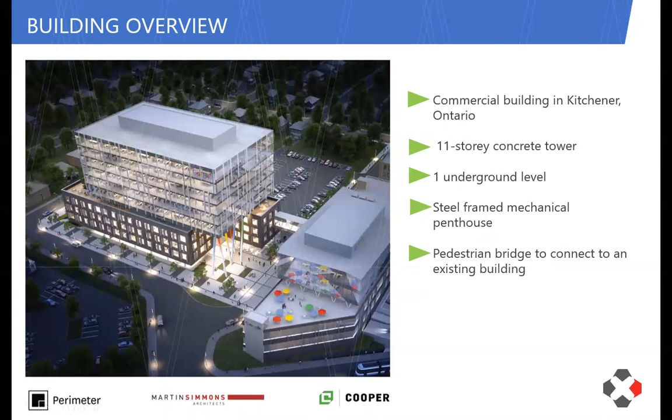Okay, thank you. The main feature of this building is structural steel columns that support a sixth-floor overhang at the corner of the building. So that was the main design challenge of this project. I'll get into more of the design and construction challenges a little bit later in the presentation.

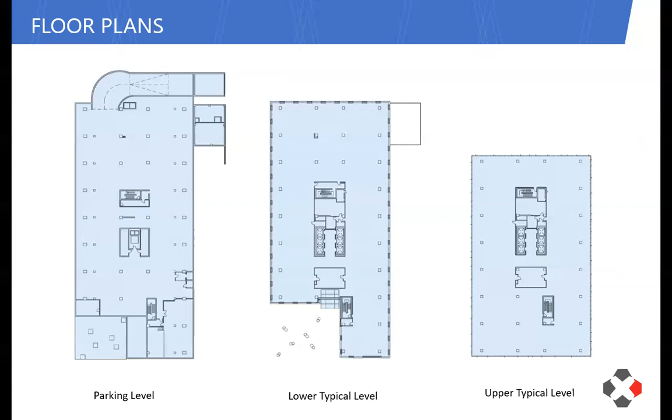So the floor plan for this building, it's an office building, so we were able to use a pretty simple concrete column grid system. The underground level is parking, the first framed slab level is the ground level, and all the levels above that were typical office loading.

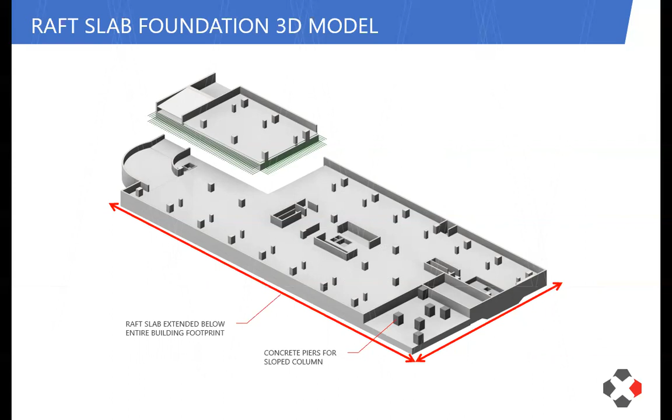Typically in this type of project with concrete columns, we like to use concrete spread footings. However, the geotechnical report revealed that we had quite low bearing, only 200 kPa SLS and 300 ULS. And with our loading, spread footings just weren't an option.

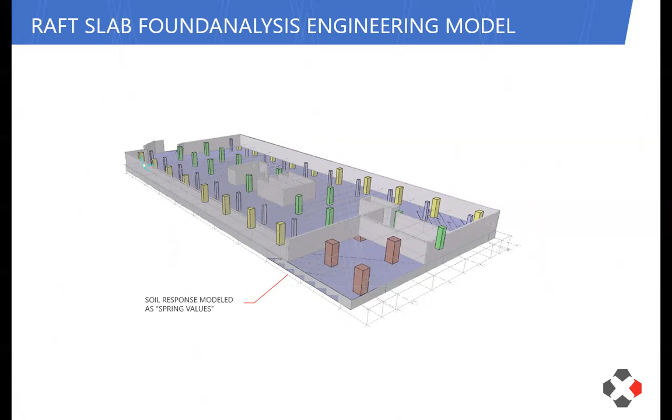So we had to pivot and use a raft slab. We used SAFE to model our raft slab, using the soil modulus to mimic the soil behavior under load. Then we could evaluate the maximum pressures and compare those to our design limitations. It was a bit of an iterative process to get our final thickness, which was 1.8 meters thick.

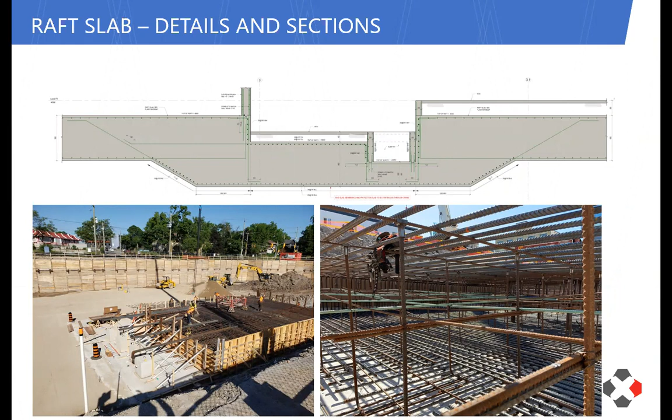As you can imagine, 1.8 meters of concrete is very thick. This is one of our sections through our raft slab. We had to step it down in certain areas to accommodate our elevator core, some pits, things like that. The picture on the left is our first pour, our concrete crane raft. The picture on the right is actually standing in between the top and bottom bars of the raft slab, just to give you an interesting perspective of the volume of concrete that needed to be poured.

A couple more photos of the raft slab through construction progress.

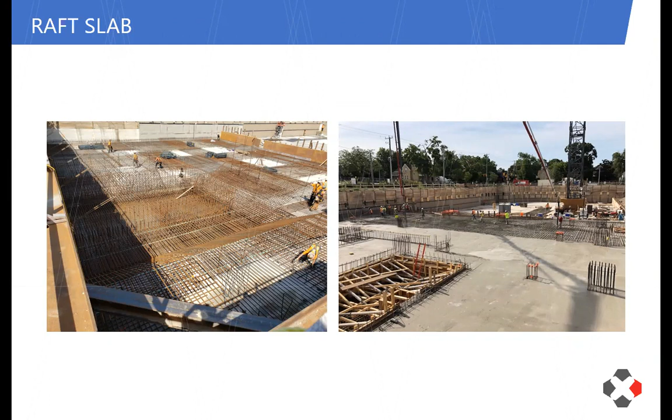Next, I'll talk about the specific foundations for our steel incline columns. We continued the raft slab into the corner where the steel columns were, and we used concrete piers at the base of the steel columns. We broke it into 2 pours, because we needed the top of the concrete pier to be at a very precise angle.

As you can see, we cast in place a set plate with anchor bolts with the second pour at that precise angle. Then when the steel columns, which were manufactured with the base plates on them, were installed, they could be installed precisely at that angle at the exact location we needed. One of the construction challenges was how to get that angle precise. Means and methods were not up to us, but we tried to make the design as easy as possible so all the trades on site could work together in an easy manner.

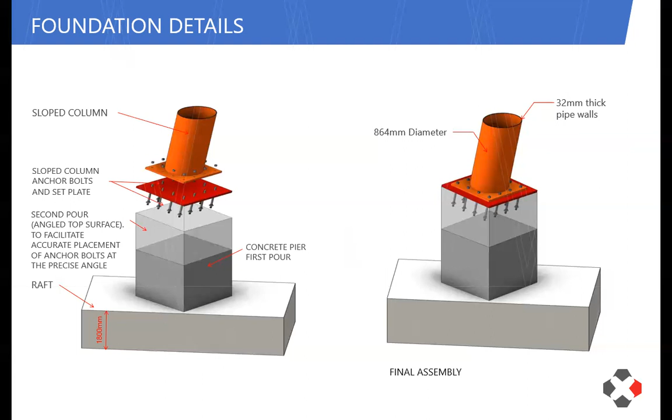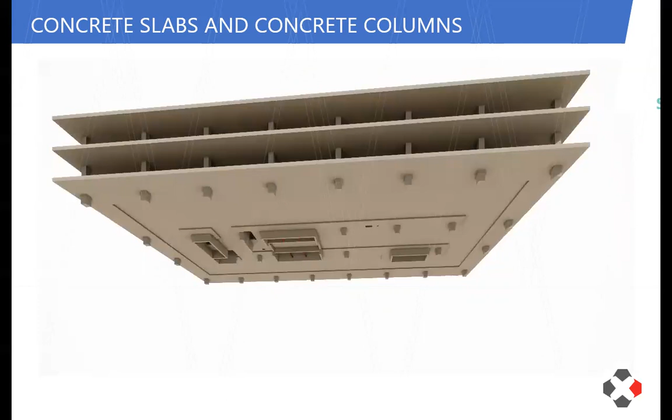Next I'll talk about our typical concrete structure. We used concrete slabs, concrete columns, and our lateral system was concrete shear walls at the 2 stair cores and 2 elevator cores. We also used continuous drop panels to control some of our limits such as deflection and punching shear.

So deflection was a big issue here. We had to go back and forth a number of times to refine the shape. It used to be more of an L shape, which created more issues for us that we just couldn't work around. We were able to reduce that L to a more reasonable size, and we were also able to use more steel around the opening, compression steel, to reduce that maximum deflection.

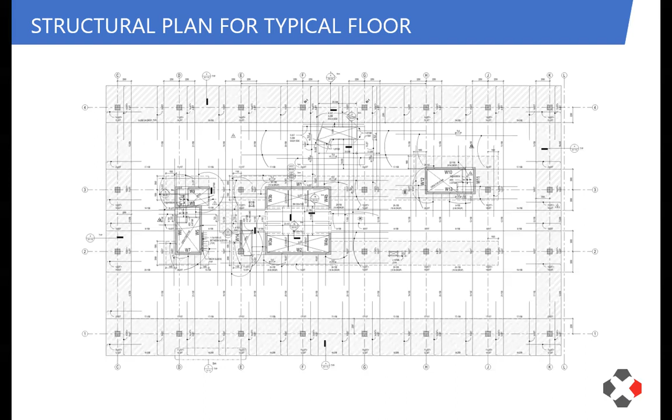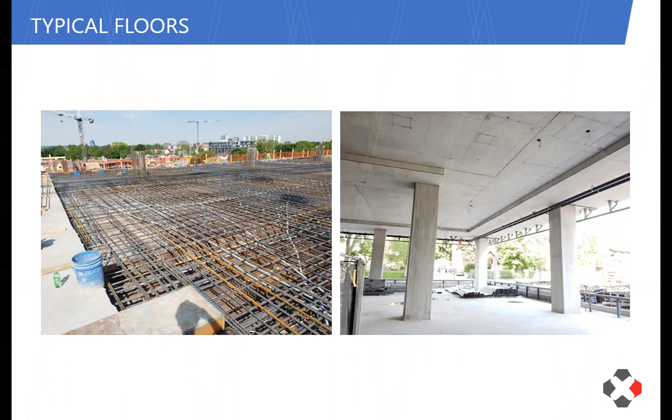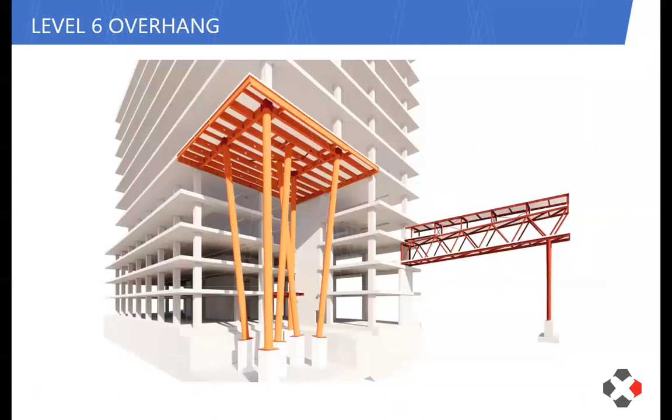These are 23 meters tall, so it's quite a feature of the building. From the underside, you can see we use steel framing, and then we use concrete on deck. So from above level 6, it's all uniform concrete.

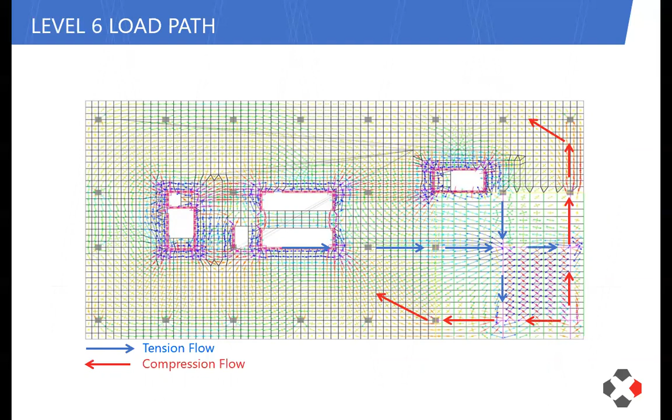These steel columns were actually only meant for gravity, only taking gravity loading. They're not part of the lateral system. But since they're on an incline, with a bit of an angle, they do create lateral forces. So we had to design the steel beams to take those tension and compression forces to the concrete slab, which worked as a diaphragm to transfer those forces into our lateral shear walls. That's how we resolve those forces, so the columns could act only in gravity.

These steel columns were actually big pipes. They weren't specifically manufactured or custom for this project. These steel pipes are actually used in industrial purposes, but we were able to purpose them for our structural use. What made them unique to this project was the length, so they had to make 2 together to create that 23 meters. One of the challenges in the shop was to make that weld seamless, so visually it matched what the architect wanted. The top and bottom of the columns were also manufactured in the shop.

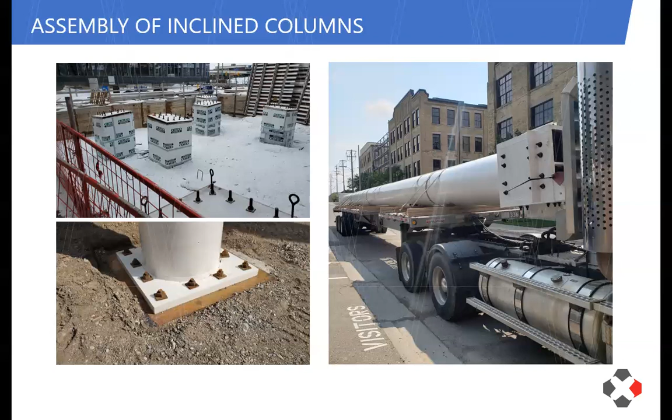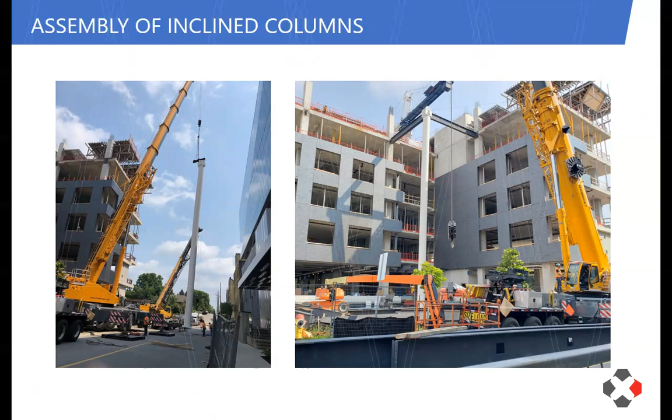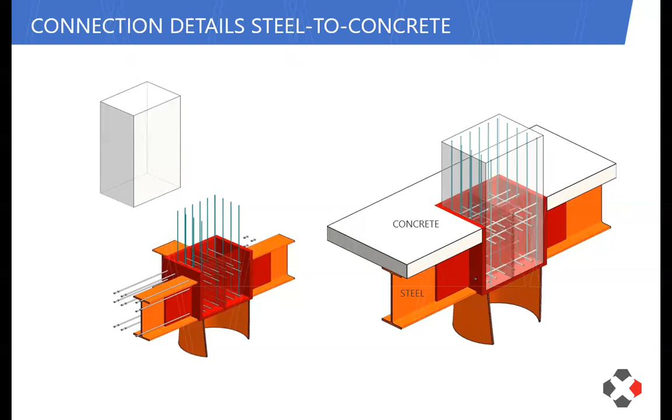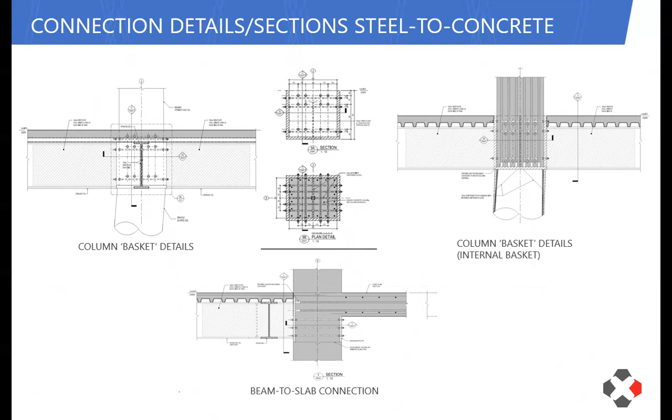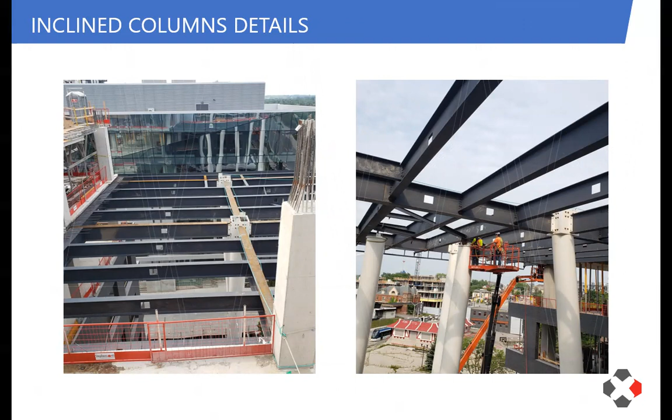Some photos of construction at the top of the steel incline columns. These connections were for the structural steel columns, and for the 2 non-structural columns we just used a vertically slotted connection. You can see on the left, the deck under construction with the structural steel beams. On the right, there are the 4 structural steel columns in place, full height. The one in the middle is one of the architectural ones.

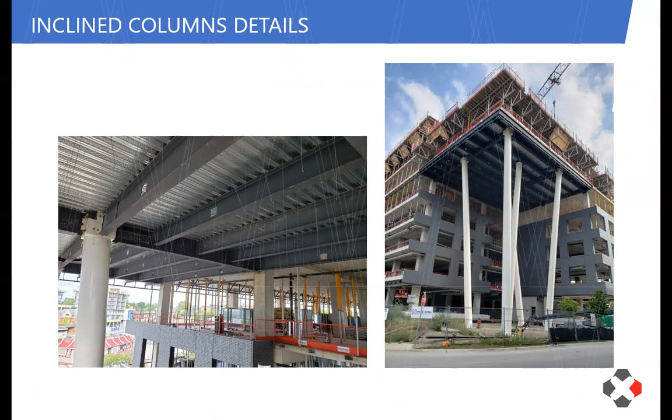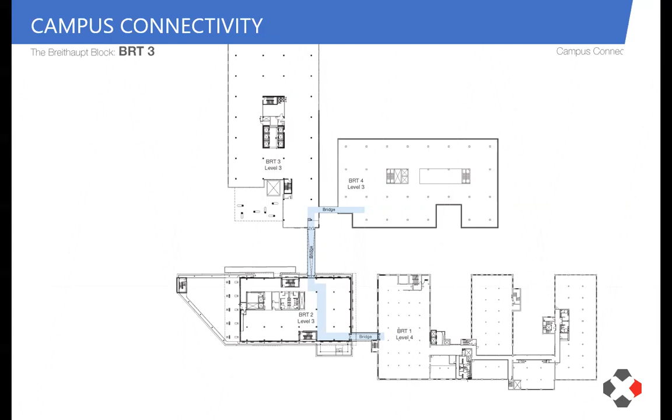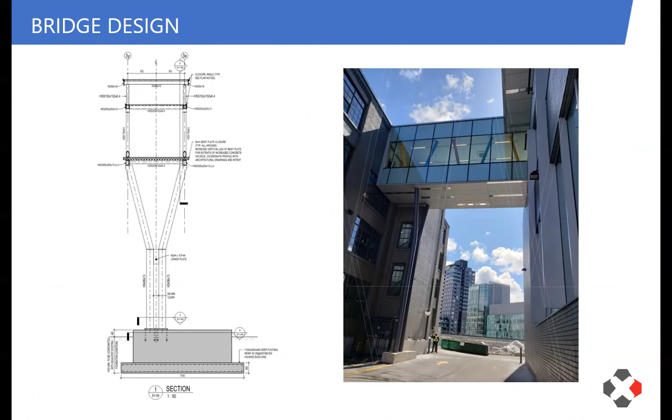On the right-hand side is a photo of the already existing bridge connecting the first and second buildings. Our intent was to match the design of this bridge so it all looked cohesive across the campus. We utilized the steel Y-shaped column in our bridge. This was useful for us as we didn't actually connect the bridge physically to the existing building. We used an expansion joint, and that Y-shaped column provided the bracing and the gravity support at the existing building end. Then on our end, we physically connected to our phase 3 building.

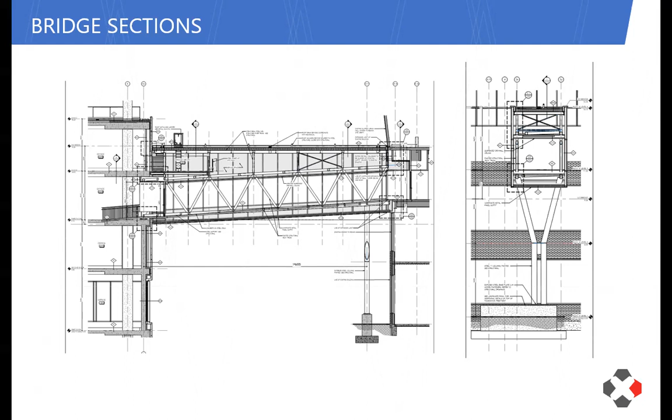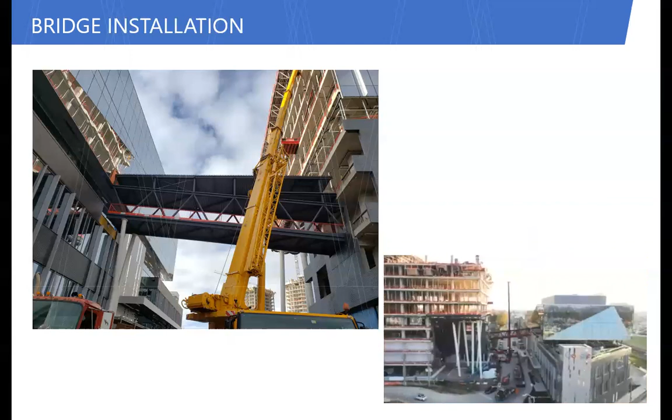One of the other design challenges we had was the foundation for the Y column. We ended up using helical piers so we didn't disturb the foundations on the existing building. Otherwise, we would have had to interfere with those foundations, which just wasn't realistic at the time.

Here's a photo of the final placement of the bridge. A couple weeks ago, we found out that this bridge won an award of excellence in steel construction from CISC, in the category of architectural walkways, pedestrian bridges. This included us as the structural consultants, the architects, the steel erection company, and general contractors and developers. So the whole team was involved in that award.

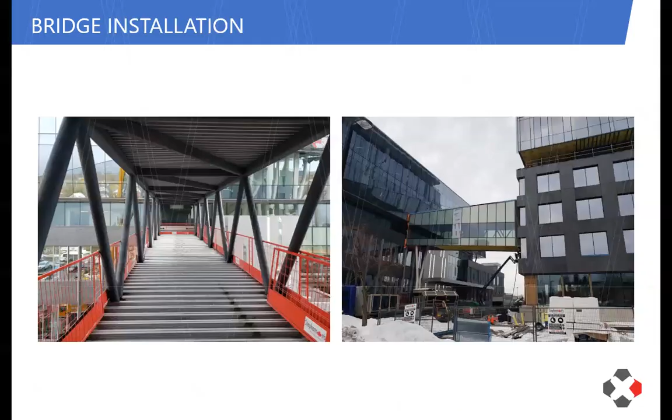Here's a photo as of a couple months ago. As you can see, all the steel elements, all the structural elements are in place - all the steel columns, the pedestrian bridge, all the cladding is finished now. So all the main structural components are finished. Now they're just working on the rest of the building - electrical, mechanical, the tenant fit out requirements before occupancy. Are there any questions?

I have a question - are the structural columns also connected with an angle, or is it just what I'm seeing in the pictures? They're actually at an angle.

So the common joke is that architects always want engineers to magically defy physics. Do you get a lot of that? Yes, I've joked with coworkers that they want floating things, and we can't make floating things happen. They were pretty insistent on this kind of feature, so we made it. It's a pretty neat, pretty unique feature.

You said there are structural inclined columns and then non-structural ones - how did you ensure they don't carry gravity loads? At the top of the non-structural ones, we use a vertically slotted connection, which allows a little bit of movement at the very top. So the gravity load will never reach those columns. Also for lateral loading, all of them are designed just for gravity loading.

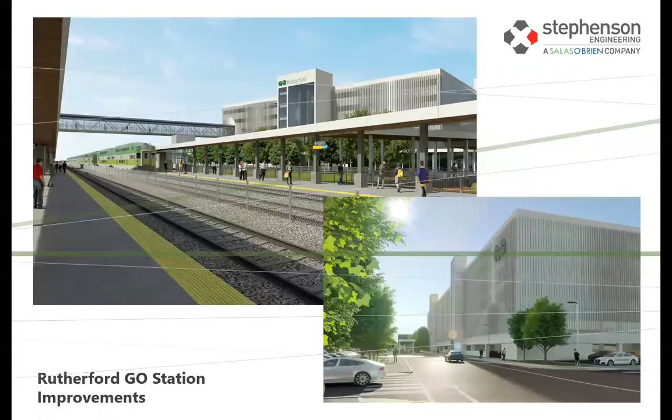I'll be talking about another project we did. This project was finished just last summer. It's a different type of job - this is not what we'd call a building, which is 90% of our work. This is a transit job. This is Rutherford GO Station. I don't know if some of you are already familiar with Toronto - we have these GO stations for commuters going all the way to Toronto Union Station to their offices. This one is on one of the lines coming into Union Station.

Rutherford is an existing GO station already in Vaughan. Metrolinx, which is the owner, or the main client of all of these stations, a crown agency funded by the provincial government, wanted to improve that station. It didn't have enough parking, and it only had one platform - just two tracks with one platform, no other platform, just on one side. So they wanted to improve it. This job is a P3 job.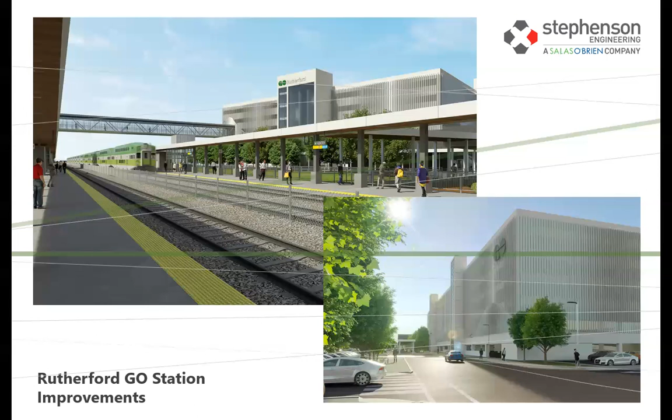So what is P3? In our daily projects, we get hired by a client, a contractor, or an architect, through an RFP or request for proposal - we put in a pricing and they choose a team based on cost and qualification. But these governmental or infrastructure jobs are more complicated - really big jobs, we're talking $500 million to $1 billion, like a hospital or a transit station. So it's a big risk for the government to just say 'this team will do it.'

So what they do is go through something called public-private partnership, P3. It's basically a procurement method where Infrastructure Ontario, the government in that case, and Metrolinx, hire 3 teams. These 3 teams will work for a certain period.

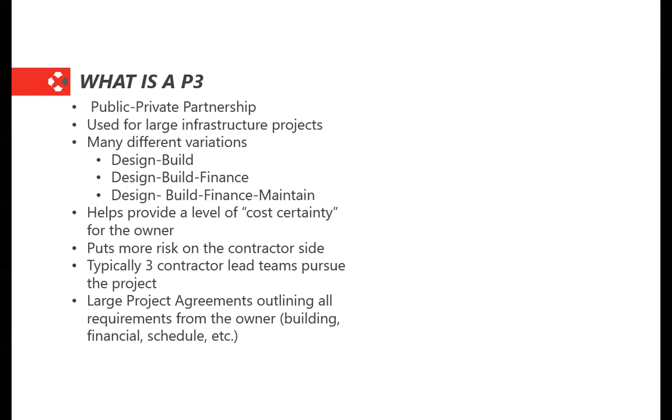So what does this mean? So during design, let's say a year of design, we're all working hard as one team, and there are other 2 teams working, coming up with all of the ideas to improve cost and schedule. Because you don't know, you have to really work hard with innovations and ideas to be the winner at the end. And most actually the cost, we're carrying the cost on our own. Like the government would pay us something, but not enough to cover our costs. So there is even also a risk here that if we lose a job, we're losing also on our bottom line and our finances.

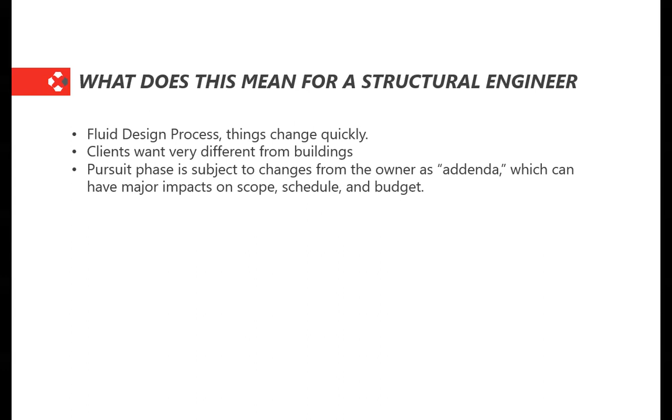During that time, ideas can change over time, so you can keep repeating design. Everyone coming with an idea, the contractor would say it's better to do it this way or that. So it keeps changing. But we've been doing this for at least 2 decades now, and we've been familiar with the procurement.

Now let's talk about the project itself. So the project, you can see here this aerial view. This project is completed now. So this was a rendering way back. It's a $240 million contract.

It has a parking garage component, which you see over that 6-story parking garage, because that was one of the purposes. There was not enough parking, and it was a problem for commuters always. They couldn't find parking. I remember when I was working downtown years back, I got tickets many times because I couldn't find parking.

So that's the 6-story parking garage. And also all of these, the platform on this side, that was an existing platform. They wanted to improve it, and we built a new platform on the other side. We basically connected them with tunnels below the railway. And also to go from the garage to the other side, we have to connect them with a bridge over the railway. There is a lot of other canopies and things like that.

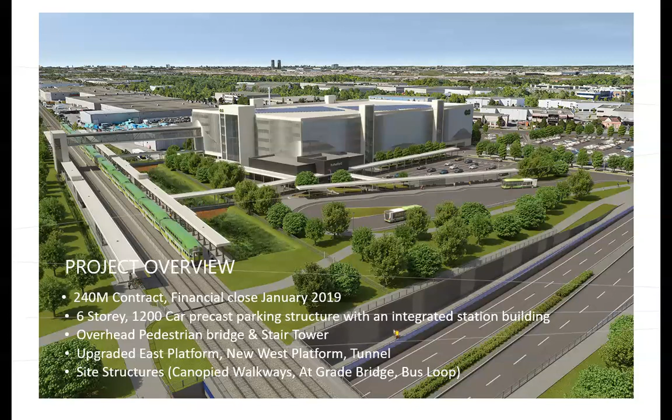So we'll talk about the parking structure. It's a 6-story structure, as you see here. It actually had some solar panels on the top. It was a precast garage. When we design precast, it gets a little bit complicated in terms of we design foundations, we design the lateral system, and we are, at the end, the engineer of record. But we get a precast engineer who will design all of these precast elements.

So when you look at the floor plan here, I think this was about an 18-meter clear span for the cars to go through. So these are pre-stressed double T's to basically be able to span 18 meters, or 60 feet, and precast columns. We put it here, inverted T's, which the precast double T's would sit on, which you will see usually whenever you go to a parking garage. And we had the lateral system with shear walls here. These were cast in place, not precast.

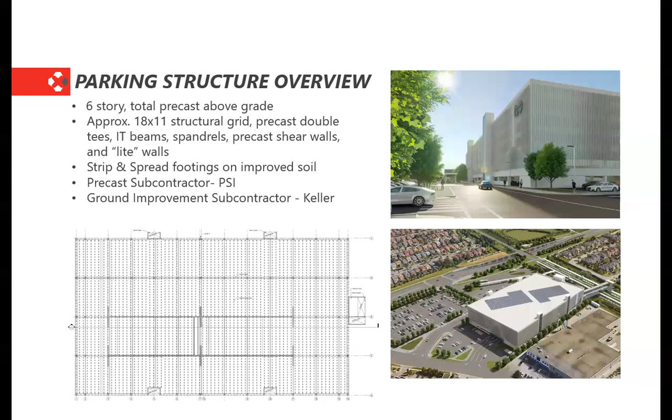Now, the footing was a challenge. So Alex talked about in the Kitchener job that Alex presented, we had only 200-300 kPa soil capacity, which is not enough. This is a precast concrete garage, very heavy for 6 stories. So again, we got 200-300 kPa, which wasn't good enough.

So we're thinking about foundations, which is expensive. There's a technique, I'm not sure if you guys have heard about it, but there's a technique that's happening, now being implemented in a number of projects, called soil improvements. Basically, you improve the soil. Some geotechnical consultants or geotechnical companies are expert on that, and will basically improve the soil to give you higher bearing capacity.

Through that, the company who did the work at the Keller Foundations was able to give us 200, 300, 450, 650, which was really good to still go with the spread footing. This was cheaper than going with caissons.

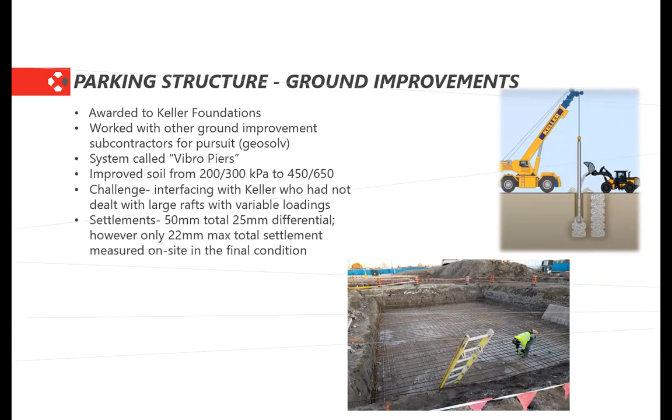But the design for this soil improvement and foundation was very challenging. As structural consultant, we had to go back and forth with them, including the loads. They give you the stress contours below grade, and then it goes back to the consultants and back again. It requires a lot of iterations, because they have to improve the soil very specifically where you need it. So it's a delicate technique, making sure you get the soil improvement exactly where needed. It was a back and forth between us and them.

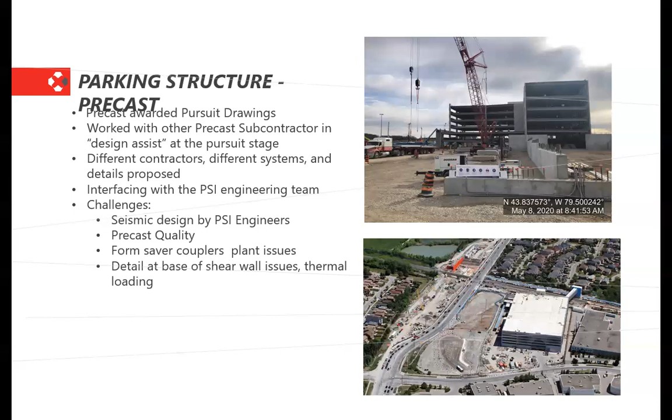Eventually we worked it out. The precast, as I said, was done. There was a precast engineer we've been working with. You can see here during erection where the precast was going up, and these are the shear walls that were cast in place.

Now that was the first component. The other component is the station building, where people go to buy tickets before going to the platform. That station building was a single story, not complicated — a steel building. We went with steel, and the majority of the elements in the station were steel.

The challenge was that it was just adjacent to the parking garage, and there were some fire separation issues which made it a bit complicated. In the end, we had a single story building with a metal deck roof, but we had to do concrete on metal deck for these fire issues, which isn't really normal for a single story building.

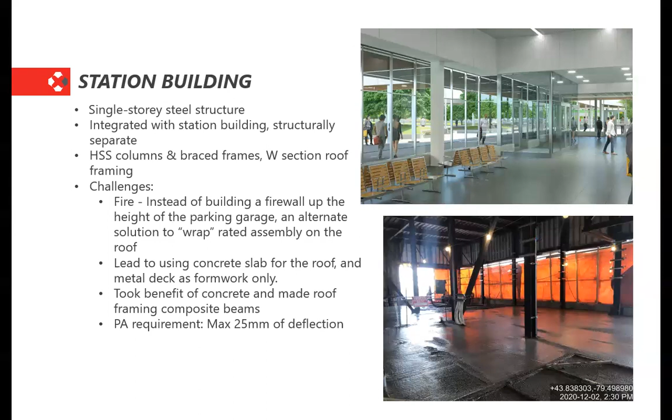Now, the platform structures. We had to do improvements for one of the platforms and build a whole new platform on the other side. The improvements meant putting in new platforms, so we ended up putting steel columns and steel canopies through the entire platform. These platforms are about 80 meters long, and we covered about 60 meters of that, with columns every 4.5 meters on center. There were some challenges.

You see something called OCS allowances. The government is looking into electrifying all of the trains in the future — right now they just run on fuel. Eventually you'll see wires along all these tracks where the trains get their power from, so when building the station you want to plan ahead. We knew from the owner where these future columns would be and what kind of loads we'd be getting, so we designed for them and included them in the canopies and columns. Some of these columns you see here will be reinforced to accommodate what will happen in the future.

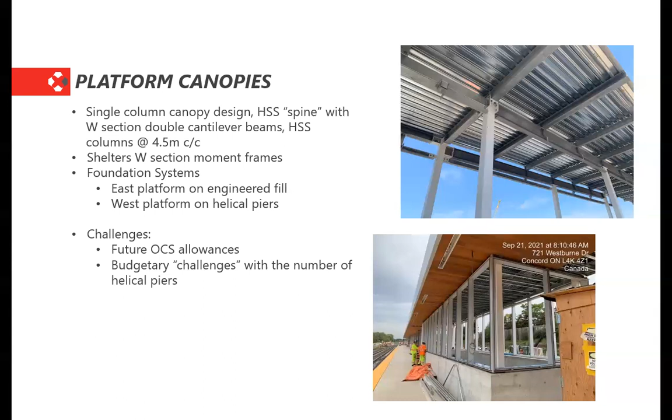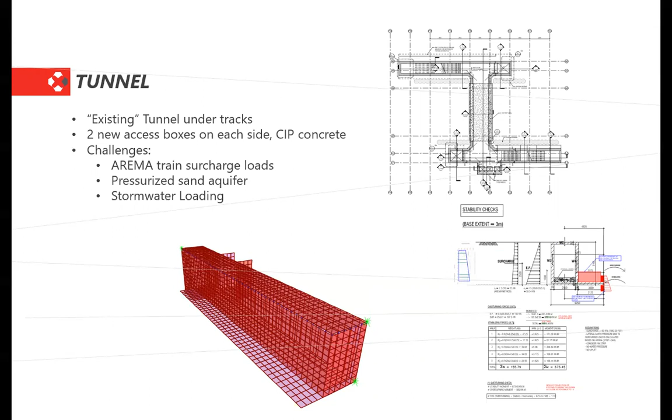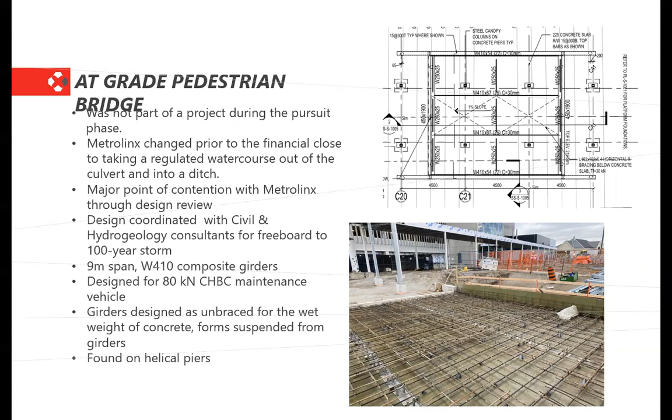There was also some site work. We had two small pedestrian bridges taking you from the garage, but these are on grade so you wouldn't really know there's a bridge there. We had to design those to the highway bridge design code, which felt sort of insane since they're just 9-meter bridges. We also had to do some canopies on the bus loops — for the buses coming into the station, we designed canopies above them.

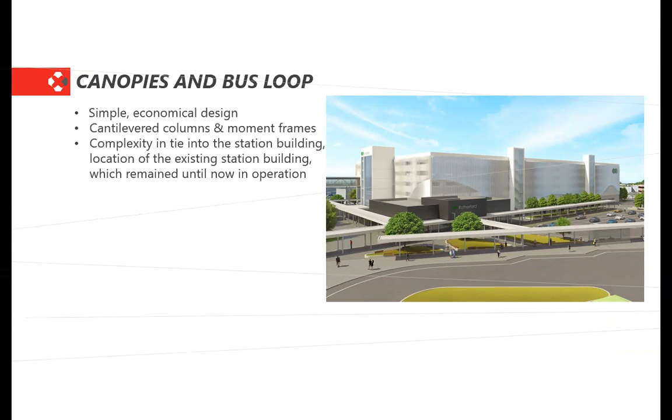That last piece is similar to what Alex showed about the bridge connecting the two buildings. Here we had an overhead bridge connecting the parking garage to the east platform, where people can cross to the further platform. That's the big bridge — a 45-meter bridge.

The idea about that bridge is it has to be above the railway, and we need clearances because the trains running below will have electrification in the future. So we had to make sure the bridge is above all of this. Metrolinx gave us all the requirements for how far we need to be above the rail, so it's not just the height of the train, we need to be way above that.

So what you see here is the bridge configuration. It's a truss on each side, and that truss is basically what's spanning. The truss is carrying the floor below, carrying the roof above, and it's taking that gravity load and even lateral load to one side.

This side is where the parking garage is, when you're coming from the fourth floor. On the other side is what we call the stair tower. If you remember what Alex presented, Alex showed a bridge that was isolated on one end. It's not connected to the existing building because you don't want it to mess up the lateral system of that existing building. So here it was the same idea.

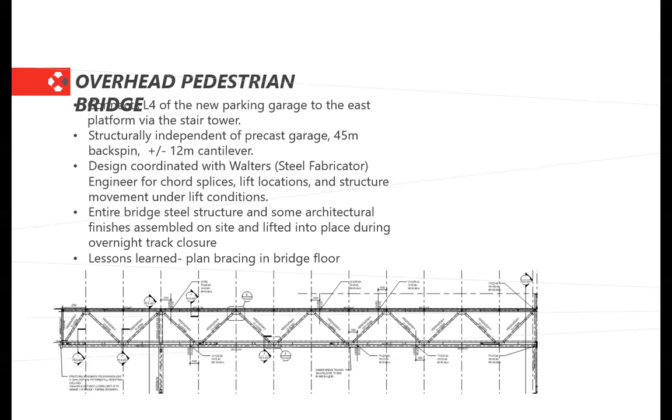So this is the stair tower on the platform you see here. This was all structural steel, about 3 stories high. This tower had to be specially designed because it's sitting on the platform. There were concerns about pier protection — what if a train derails out of the station and hits the tower? That means the bridge would collapse, so we had to take this into account in the design.

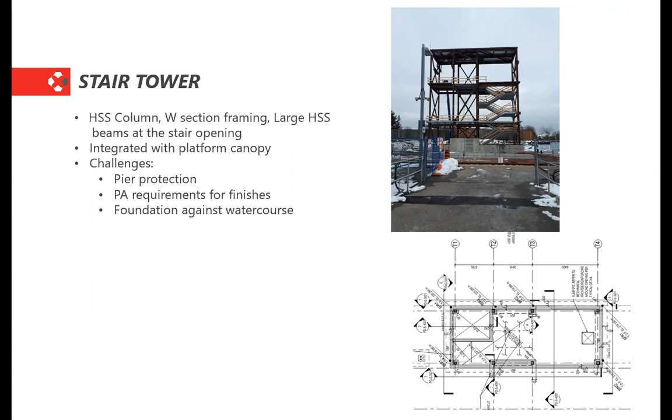Now the bridge itself — this is where I'll end the video. That bridge was installed in pieces, actually assembled on the side. It's a 45-meter bridge, almost 50 meters, so you can imagine trying to transport these two big trusses with the deck — it would be impossible. So what EllisDon, the contractor, did was fully assemble it on site in two pieces.

They did all the electrical, mechanical, all the services, ceilings — whatever they could do on the ground, they did it, to minimize people working on top of the bridge. Whatever you can do on the ground is always easier. So they assembled these smaller pieces on an area to the side, and then spliced the bridge together.

Now, to lift the bridge there wasn't much luxury here because these trains run all the time — not just commuter trains, but also CP rail freight trains, which run constantly. So the contractor had a very limited schedule, only able to work during the night, from about midnight till 5 or 6 in the morning on a weekend, to get the bridge lifted.

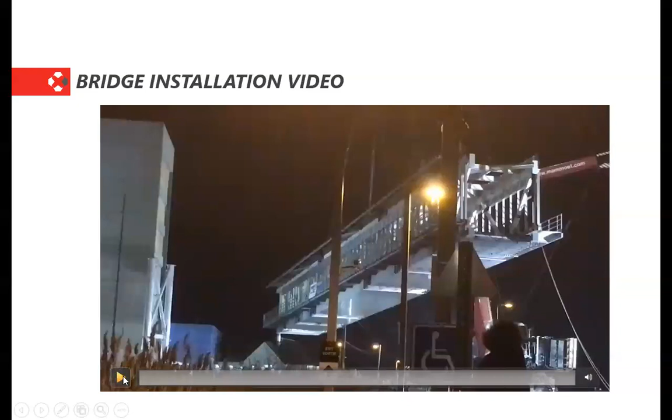So actually I was there. Let me show you the video, to show you how complicated it was to raise it.

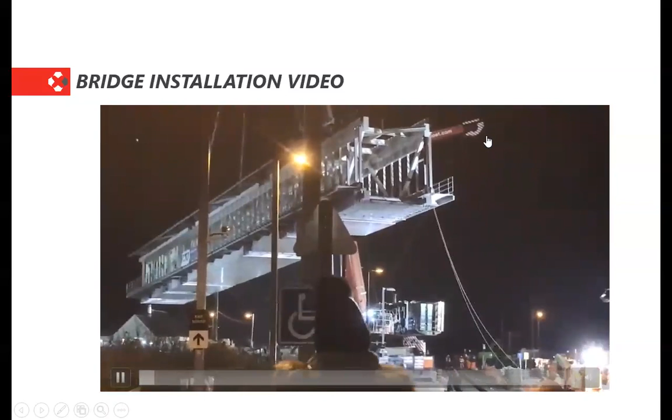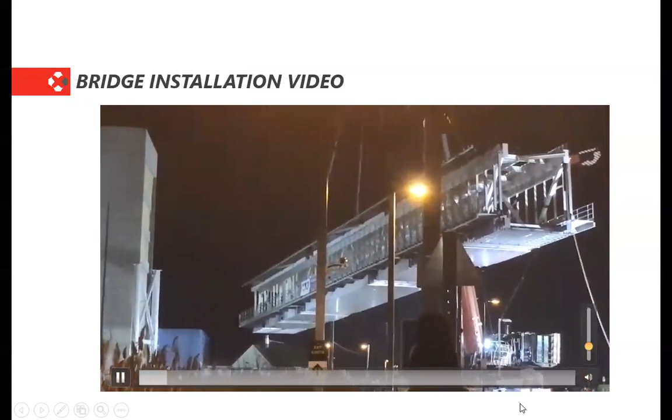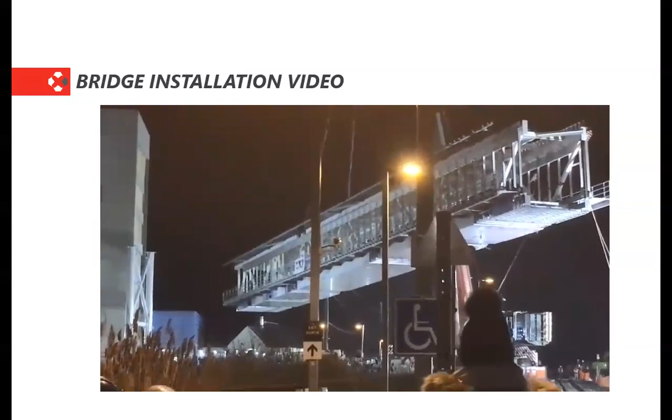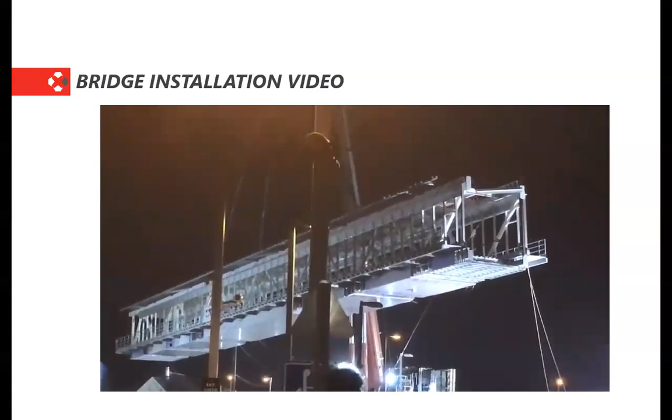I think I took that video around 1 in the morning. You can imagine the whole team and safety precautions involved, because if anything goes wrong it would be a disaster. It's a very heavy bridge, and we had a special crane to lift it.

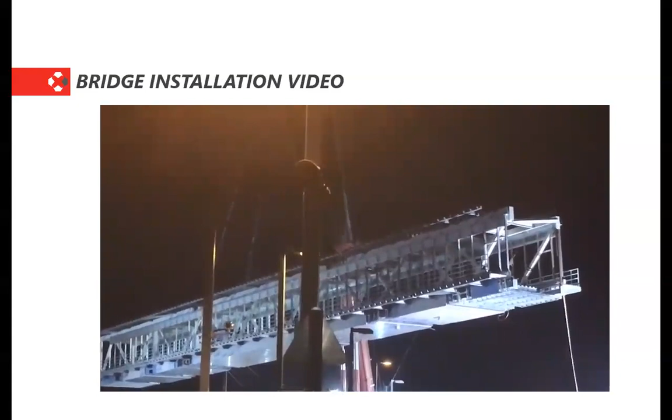As you can see here, even the finishes for the bridge are already done — you can see below the bridge, the soffit is already finished, because you don't want to do this work above the train.

So this is the parking garage on that side, and that's the steel column, the steel support on the side of the parking garage.

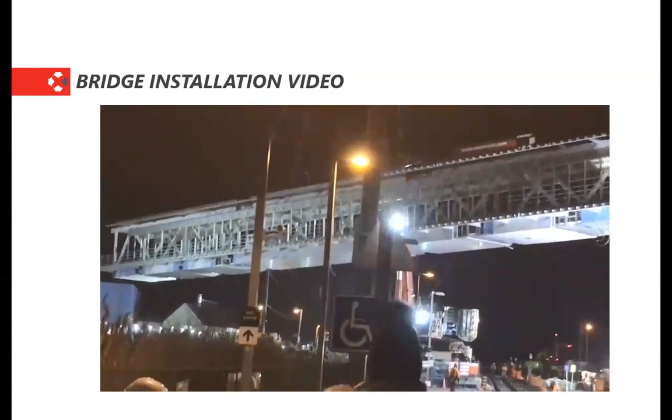So you'll hear some people talking on the ground.

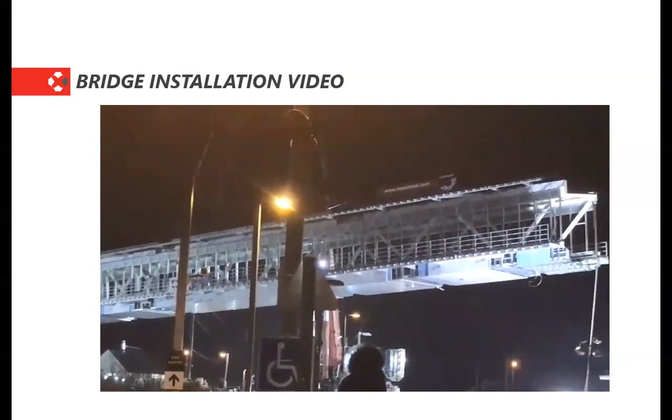And on the other side, that's the stair tower I was talking about, on the platform, which is the new tower.

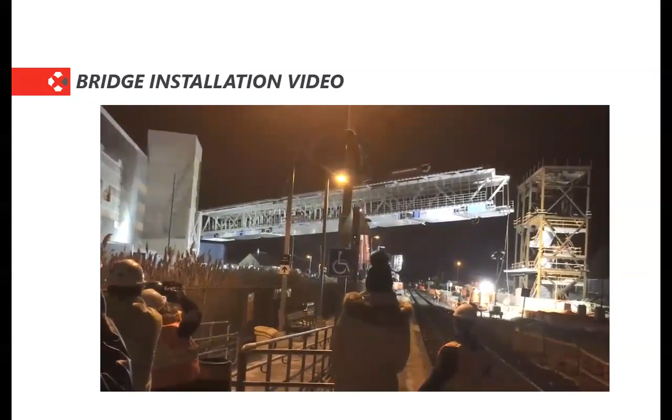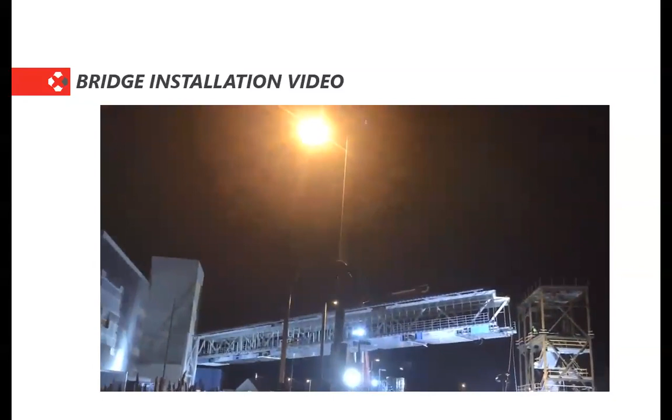So you can imagine how slowly we have to rotate something that big, making sure it fits between both sides.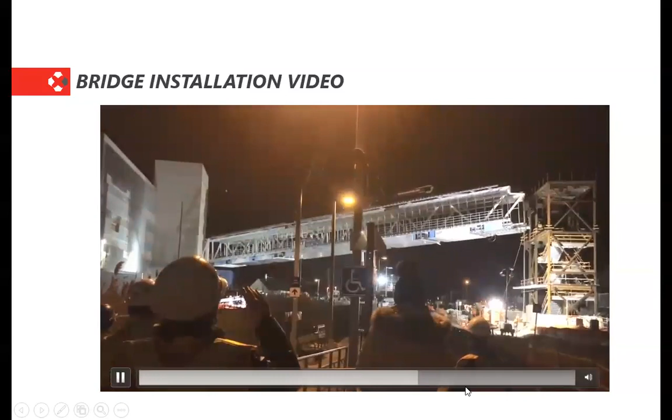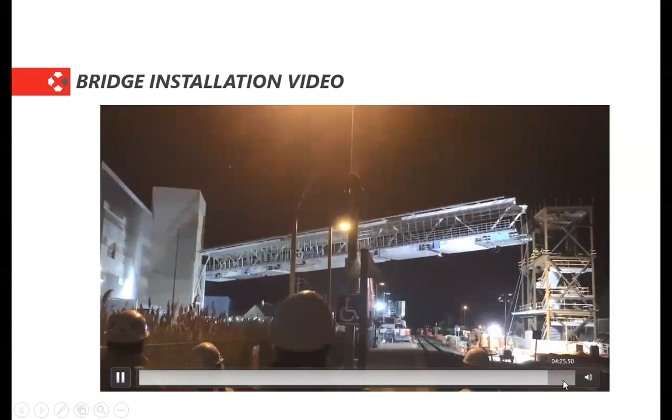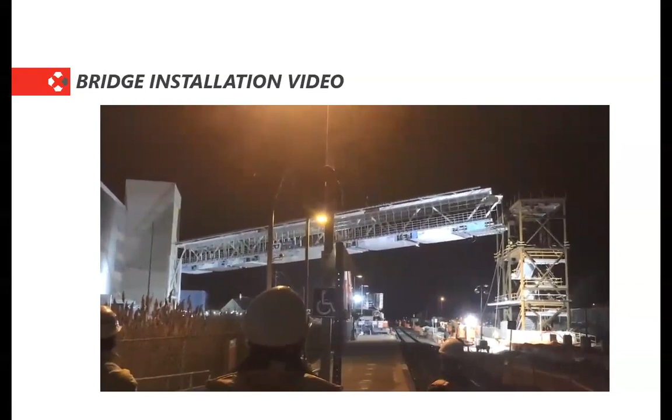We were just running it quickly, which is a very slow process. I think they were almost there. I didn't sit down until late at night, and didn't want to stay until it was basically fixed, but by 5 in the morning everything was set. So again, that's the Rutherford GO Station project.

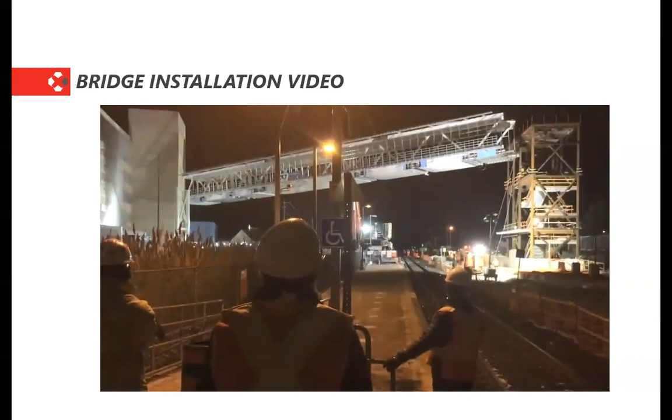Please feel free, if you want, to take the train sometime and visit it and have a look, that would be good. Any questions on both projects? Do we have time? Maybe 5 minutes. So now if you have any questions, feel free to ask about this project or what Alex presented.

Question: for this project, you talked about how difficult it is to do the prefabrication and installing it. But if it's possible, would that be the recommended route, to do it on site? It will differ by project, it depends on the location, the site, and the constraints. But most of the time, for something like this that you want to put on top of a railway, you definitely want to prefab it. It doesn't have to be done inside, maybe fabricated in the shop, but it has to come in pieces. Here they took the option of doing it on the side because they had the room to put it together. On another site you might not have the room, so you'd have to do it completely in the shop and bring in small pieces to connect on site. It all depends on the logistics and what's happening with the project.